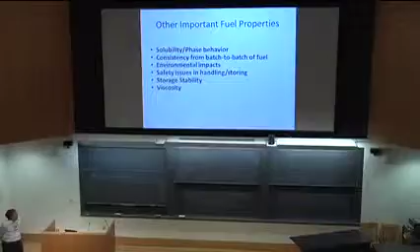Important fuel properties: solubility and phase behavior, consistency in production, environmental impacts, safety, storage stability, and viscosity.

All right, so solubility and phase behavior. A really important thing to realize about alternative fuels is that it's very likely that they're going to be diluted into petroleum fuels to start with. And if you start adding a lot of the alternative fuel into your petroleum fuel stream, you can exceed the solubility limit, and that can cause a lot of trouble. You can make an emulsion, you can have different kinds of phase separations, and that can clog the fuel filter, clog the fuel injection system.

And so that's a really serious performance problem. And so you have to really know the phase diagram of your proposed new fuel component with gasoline or with diesel or with jet fuel, whichever you're going to try to dissolve it into.

Also, in practice, all the fuels are often exposed to water. There's leaks in the tanks, there's leaks in the pipelines, so there's water present. And the current fuels are designed to be very hydrophobic, so they don't really dissolve into the water. If you have a fuel component that does dissolve into the water, when the water comes into contact with the fuel, that component will migrate over into the water phase.

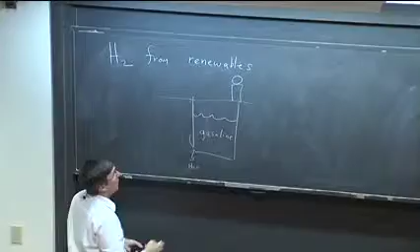For example, suppose you have a gasoline tank under the ground at a gas station, and you have your gasoline in here. If you have a little leak here, and there's groundwater flowing by, the gasoline, if it has components that are soluble in water, those will tend to migrate into the water.

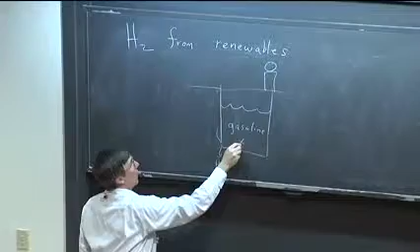And they'll be carried away. Suppose I have some molecule X, and it's soluble in water. After a while, this water is going to have some X in it. And if this goes down to somebody's well, and then they drink it, then you better hope that X is not toxic, or you have a really big problem. So knowing whether or not the component you're adding to the gasoline is soluble in water, whether or not it's biodegradable, whether or not it's toxic—those are crucial things you need to know.

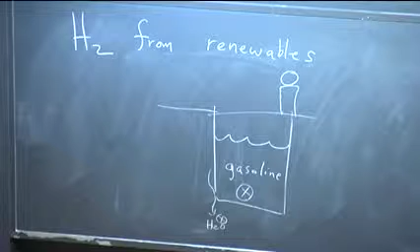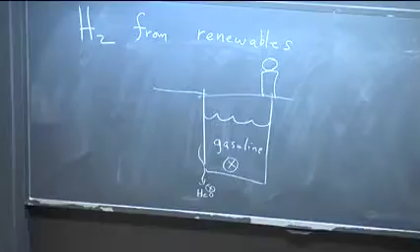Also, a more subtle thing is that if you get water into a tank, sometimes you have weird phase behavior, so that you have some polar components dissolved enough in the gasoline that it's okay, but when you add water, it might form a two-phase or even a three-phase system. And so that can be surprising to you, that you thought you were safe, but because you add a little bit of water, you may actually induce a phase separation.

And that's a problem in pipelines. So right now, ethanol is shipped separately from gasoline. It has to be mixed up with the gasoline very close to the gas station, because they found out when they put the ethanol in the gasoline ahead of time and shipped it through pipelines, there were little puddles of water on the bottoms of pipelines. When the ethanol-gasoline mixture got in contact with that water, that phase actually expanded.

A lot of the ethanol went into the water phase, and then you get big blobs of water-ethanol. The gasoline that went through was being stripped of the ethanol, so it didn't have the right amount of ethanol in it. And every once in a while, a big slug of this water-ethanol mixture would come out, and the person who filled their car up with the water-ethanol might be really annoyed because their car wouldn't work. So this is a problem.

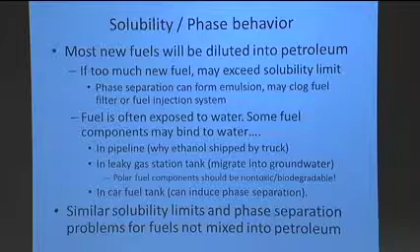And there's similar kinds of problems with solubility if you have a different vision. So if you don't envision that your new fuel is going to be mixed in with the petroleum fuel but kept separately, you still have to worry about what it's going to do with water, because your tanks are still going to leak. You're still going to have groundwater nearby, and you're getting some water into your tanks, so you have to figure out what's going to happen. So you really have to know your solubility and phase behavior.

Consistency. So we're making most of the fuels from materials we dig out of the ground or we grow plants, and it's very inconsistent. The stuff you find in nature is not pure anything. It's some mixture, and the mixture composition varies from place to place and time to time.

But when you make the fuel, you want the finished fuel to always satisfy the specifications that are important for the engine operation. And so this is tricky: you have to make your manufacturing process robust over the range of variation of your input materials.

The whole system for fuel distribution, processing, and vehicles is going to work over some range of fuel parameters. But if your fuel gets outside that range, it's not going to work, and there'll be some failure. Who knows what the failure is going to be, but it's something bad, probably.

Because the scale is so big, if you're running 80 million barrels a day, even a 1% problem is 800,000 barrels in one day. That's a really big problem.

So if you have an off-spec batch of fuel, say you're running a refinery that's maybe 30,000 barrels a day, you run it for 8 hours, one shift, you have a problem. Say the operator in one shift doesn't know what he's doing, and so you make an off-spec batch. Well, that's a problem. Now I have 10,000 barrels of material that's off-spec. I can't sell to anybody.

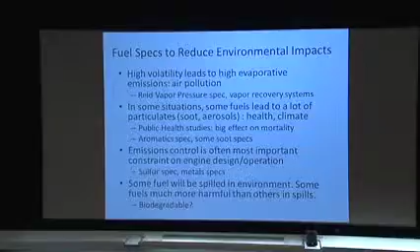This leads to fuel specifications like the sulfur spec and specs of metals in the fuel. Those of you who work in diesel fuel will be familiar with ULSD, ultra-low sulfur diesel specification. Your new fuel, when you manufacture it, whatever you start with, is likely to have some impurities in it, so you have to make sure those impurities are low enough to satisfy all these requirements.

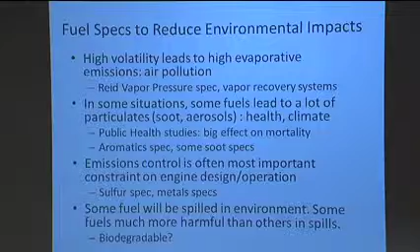And then biodegradability is a critical issue. There's a lot of components in fuels. Some of the components are very innocuous, some of them are really bad, and you've got to know when you make your fuel what you've got.

All right, fuels are really dangerous. Gasoline, for example, is 35 megajoules per liter. That's a lot of joules, and if you light it, you'll know it. Have you ever seen those nice explosions in Hollywood movies? They're usually just a tiny bit of gasoline, and you can make a really impressive fireball.

Also, most of the fuels are toxic, mostly carcinogenic. A lot of the fumes affect the brain and nervous system. Basically, they're really bad, and so the safety issues are really very serious.

There's a famous story about low volatility and high volatility. If you make the volatility low enough, it's hard to ignite the fuel because you're at the lean limit—you don't have enough fuel in the gas phase. So that's safe. Diesel fuel is designed to be like that.

If you have a very high volatility fuel, the tank will be flushed, all the air will get flushed out. In a gasoline storage tank, the gasoline is so volatile it makes enough vapors to push the air out of the tank. So at least the mixture inside the tank is not flammable because there's not enough air—you're at the rich limit. Of course, there'll be some distance outside the tank where it's mixed with air, and there will be a place where you can light it on fire, which is why they have all those warning signs around a gas station about not letting any sparks nearby.

But it's much safer that way. If you could actually have a combustible mixture inside the tank, if the flame would ever flash back into the tank, you could have a really serious problem. Knowing this is very important.

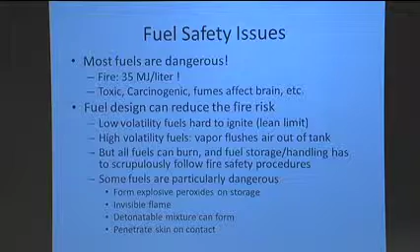Some fuels burn with invisible flames, also kind of scary. Some fuels it's possible to make detonatable mixtures, though this is relatively uncommon. And some fuels are skin soluble—the fuel will go directly through your skin barrier. That's usually very bad because it'll carry with it whatever is dissolved in the fuel, and if that's a carcinogen, it could be delivered directly into your bloodstream. So these are all things you need to worry about.

Fuel safety, storage stability: most of the fuels react with air. They make peroxides, they also make gums and phase separations, and some of the fuels will polymerize. All these problems have led to the olefin specs on fuels. A lot of fuels are treated with additives to try to ameliorate these problems, but typically this is still a problem.

So if I buy gasoline and leave it in my garage for a couple of months, then pour it in my lawnmower, the lawnmower won't work because there's so much gum that it'll clog the fuel injector. So fuels are still not really that stable.

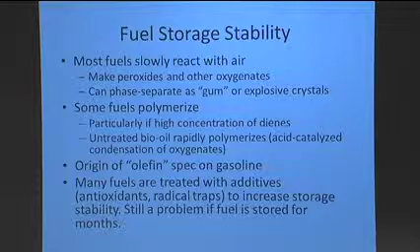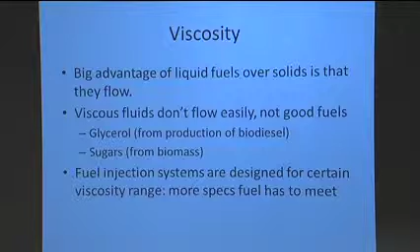And then viscosity—you just have to have a low enough viscosity. This is problematic for some of the biomaterials; glycerol and sugars are both very, very viscous, so they won't work with conventional fuel injectors. There's a bunch of specs that have to do with the fuel injection systems, and they're different for diesel and for gasoline.

All right, so what have we done so far? We decided that we want to have some alternatives to petroleum to reduce the environmental impacts, increase the supply and security, and reduce the price. We've thought about a lot of different possibilities and the different properties.

What happens in practice is that most of the new fuels are diluted into gasoline or diesel. That's very practical because the vehicles use those fuels and the infrastructure exists to distribute them. But it has the problem that you can't sell your new material for anything more than the price of gasoline or diesel.

But the production cost of all the new fuels is higher than the production cost of petroleum. So you're basically in a bad situation if you're manufacturing a new fuel, because you're the high-cost supplier into a commodity market—and if you study economics, that's the place you don't want to be. You're liable, if demand shrinks or your competitors' production rises, to be squeezed out. The price may drop below your production cost, and then your profit margin is really small, which means you won't be able to pay your investors back very fast. That's a really bad situation.

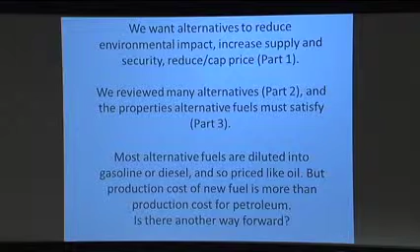So is there any other option? One option might be if you could actually introduce a third fuel at the gas station. So here's the $64,000 question: is there any possible way you could get a third fuel to succeed in the marketplace next to gasoline and diesel?

Now there are good reasons why this is hard to do. Because if you dilute whatever you put into petroleum, then basically it's mostly petroleum, and the fuel will act like petroleum—so you're not going to screw it up, and it'll work fine in the existing engines. And you don't need any new distribution infrastructure. That's a huge advantage too.

But if you had a third fuel, you'd open up a whole lot of possibilities for new engines that wouldn't have to be stuck using the same old fuels we have now. You could insulate your new fuel from oil price shocks—if the oil price collapsed, your fuel might still have a market because there might be some vehicles that especially use your fuel.

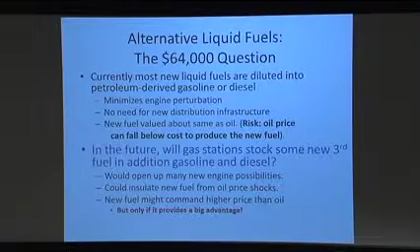And maybe even your fuel could get a higher price than oil, if you gave some special advantage to the customer that he decides is worthwhile. But you really have to provide a big advantage to make this work. So this is a crucial question for anybody who wants to invent a new fuel that's not going to be diluted into gasoline or diesel, but actually replace them.

So let's think about how this could work. One possibility is you just make a fuel that's not soluble in gasoline or diesel. If it's not soluble, then they can't dilute it in. There are some materials like this—some polyols, some other polyoxygenates—maybe you could make these from biomass.

But this is like a totally fruitcake option—no one has ever considered this as far as I know. You'd have to think: well, if I have some new fuel that's not soluble in the old fuels, what am I going to give the customer that's going to make him want to buy my fuel instead of gasoline or diesel? That's a crucial question.

The other possibility is you could take ordinary oil-soluble molecules, but there's something special about keeping them separate that makes it worthwhile for the gas station to keep them separate and worthwhile for the customer to want to buy them specially. There are two I know of: methanol and ethanol, because they have very unusual vaporization and rather low energy densities. Those properties make them really good for octane boosts if you do direct injection. When you directly inject into a cylinder, you get a very big evaporative cooling, so the temperature of the cylinder drops a lot, which changes the ignition delay a lot.

And so you're in a condition where your fuel would tend to ignite too fast. This is a way to really slow it down. And also you get a lot of charge cooling because you put in a fuel with a very high energy of vaporization. So you can get a lot more air crammed into the cylinder.

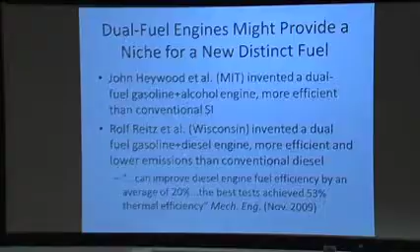And I think Ford is pursuing this, but it has not commercialized it as far as I know.

Professor Reitz, who was in the audience earlier today, invented a dual fuel gasoline and diesel engine. He takes advantage of the fact that you can shift how much gasoline and how much diesel you feed, to try to keep the ignition delay of an HCCI type engine really optimal all the time. That's also very nice. He demonstrated that under some cases you get 53% thermal efficiency, which is pretty darn good for an internal combustion engine.

And if you want to know more about that, don't ask me, ask Professor Reitz. But there's a small company trying to commercialize this one right now. Now this one doesn't actually use a new fuel, it just uses the two existing fuels simultaneously. But I think concepts like this potentially might lead to a third fuel actually being useful.

All right, so something's going to happen. The fuel production is plateaued, the fuel demand just keeps on increasing, the price of oil is going up, the current system is not environmentally responsible. It's dumping a lot of greenhouse gases in the atmosphere. Nobody has any energy security. But it's hard to predict what's going to happen to solve the problem, and it depends on a lot of policy decisions.

There's sort of a time that maybe we could add a third fuel at the pump, but who knows what it's going to be. Maybe it'll be electricity. Maybe the whole thing will be plug-in hybrids and there'll be fast recharge stations at the gas station. Who knows? The key is, if the vehicle technology can actually take advantage of the third fuel in a way that the customer and everybody can see a real benefit, then I think there's a chance this could actually happen right now because of the whole situation.

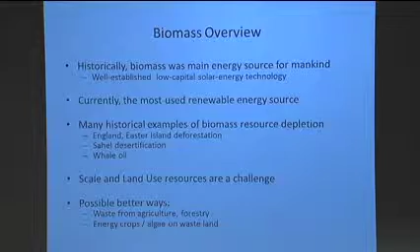But there are some possibilities. There's a lot of waste actually from agriculture and from forestry, and you could try to use that waste material more efficiently and maybe get some energy use out of that. It's also possible you could grow special crops or algae on wastelands, taking land which is not really valued right now and making it into something more valuable.

Now, the way biomass works is that fundamentally it's solar energy, and we're just using the plant to capture the solar energy for us. And this is the reaction. The process is about 1% efficient, so you can capture about 1% of the energy that's in the photons ends up being captured in the biomass material. And the solar constant is pretty big.

It's about 1 kilowatt per meter squared of energy hitting the Earth. Now, a lot of the energy reflects off stuff like clouds or gets diffused. So this is a map of where the energy actually is. The red and white regions have pretty much solar energy. The purple and blue regions don't have much. But this number is pretty big, 1 kilowatt per meter squared.

However, when you use photosynthesis, it's not very efficient. So you never achieve 3 megawatts per kilometer squared, which is not that much. So, just for example, my little town of 20,000 people needs a 15 megawatt electric generator. So we would need to be using all the biomass we could grow in a kilometer square, which would be maybe a quarter of the size of my town, 100% devoted just to growing biocrops or something to grow out that much energy.

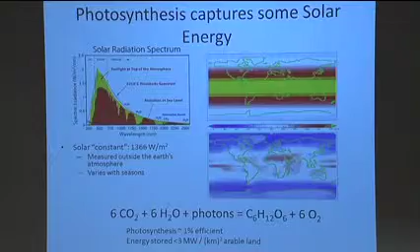The photosynthesis stores about 300 exajoules per year, which is a lot across the globe. So this is really a lot of energy. However, our energy use is even more, 400 exajoules per year. So we use more energy than the total photosynthesis of the Earth. And in fertile areas, this is the number, about 10 to the minus 5 exajoules per kilometer squared per year.

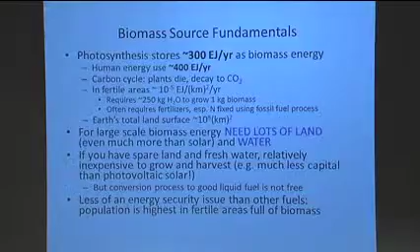A really important number in biomass is water. It typically takes about 250 kilograms of water to make 1 kilogram of biomass. So you can see it very clearly if you go from a region that has a lot of rainfall to one that's drier, the plants just really drop off fast. So if you drive west across Kansas, for example, the eastern edge of Kansas is one of the most fertile areas in the world. And if you get to the western edge, you can barely grow anything. It's 100% just due to the rainfall being different across the state.

Here's the total land surface area of the Earth, if you want to figure that out. And also, growing biomass often requires fertilizers, especially nitrogen, actually ammonia, fixed from fossil fuels. So currently our agricultural system relies very heavily on fossil fuel inputs, and so it's not really CO2 neutral. And if you were to greatly increase the amount of agriculture, you'd also increase the amount of CO2 being released from fossil fuels.

But if you have a lot of land and a lot of water, then it's a relatively inexpensive way to capture some energy, because basically you just throw some seeds out there, there's a lot of rain, and you have nice soil, things will just grow, right? And you come back and chop it all down, and you can burn it or whatever you want to get the energy back. So it's a nice, inexpensive way to capture solar energy. It doesn't take much capital investment.

You can contrast this to photovoltaics, which are about an order of magnitude more efficient at converting the solar energy into useful energy for us. But the capital cost is like several orders of magnitude higher than the capital cost of buying some seeds.

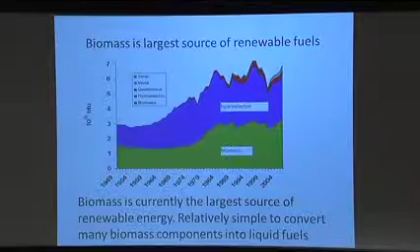But despite all that, biomass is the largest source of renewable fuels now—these are the renewables, mostly hydroelectric power and biomass for fuel. And it's relatively simple to convert many components of biomass to liquid fuels, though not as simple as you think; I'll tell you more about that in a second. The governments have recently mandated that people have to use ethanol and biodiesel in a lot of products, and because of the mandates, the amount of energy being produced as biofuels is really going up.

Historically, wood has been the main energy source from biomass. Usually a lot of biomass is wood, and people would use wood to make fires. That's the traditional thing to do with biomass. And recently, people start to make it into liquid fuels.

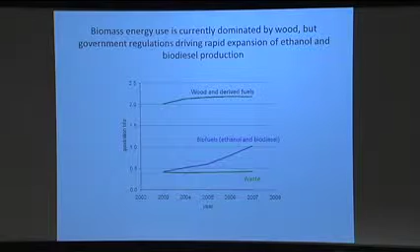All right, so let's just do a little summary of where we are right now. Ethanol is actually really old—there's evidence of fermentation from 7,000 BC, which I think is pretty good engineering back then. By 800 AD, they were distilling alcohol. In 1796, the first person made absolute pure ethanol, where they were able to get the water out all the way. Oil wasn't discovered until 1859. They invented the gasoline-powered car in 1885. In 1908, when Ford was trying to think of what fuel to use for his new Model T, he said, well, ethanol would be great. So ethanol's been in the energy picture a long time.

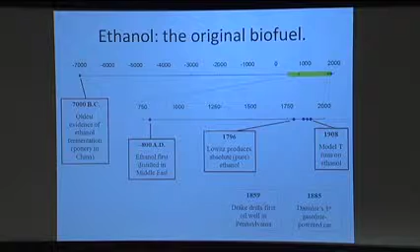And the way it's made is by yeast. If you have oxygen around, the biomass reacts to the oxygen. The yeast eats it up with oxygen and makes CO2, and it makes lots and lots of energy. But if you deprive the yeast of oxygen, they can still use this to make energy, but they only make 2 ATPs instead of 36. So the yeast would really prefer to react with oxygen, but if you're nasty and you suffocate the yeast by closing the lid, then the yeast will make do and just convert to ethanol.

Notice what happens when you take a glucose molecule. You make 2 CO2s, so 2 of the carbons go away as CO2, and 4 of them go into the ethanol. We've taken a solid fuel that's not very high energy density and made it into a higher energy density liquid fuel. So this is really beneficial from the liquid fuels point of view, and this process is pretty darn efficient.

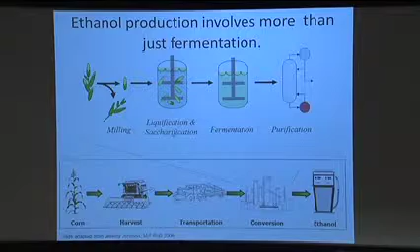Now, this process is actually more complicated than what I just wrote. You have to harvest the corn, transport the corn to your facility, then do some milling process steps. Then you put in some enzymes to convert the cornstarch into sugars. Then you take the sugars and ferment them with your yeast. Then you get the mixture, which is mostly water with a little bit of alcohol in it. And then you distill it, and you get your ethanol, and then you can send it to your pump. So this is actually pretty complicated.

The problem is that cornstarch works pretty well to make ethanol, but it takes too much land. Suppose we wanted to replace 1/3 of the gasoline used in the United States, 1/3 of the transportation fuels, using cornstarch—we'd have to use 320 million acres in corn. But the total amount of agricultural land in the whole United States is only 450 million acres. So we'd have to have like 75% of all the agricultural land in the United States planted in corn, and we'd still only replace 1/3 of the liquid transportation fuels we use. So this is really not a scalable solution for full scale—this is maybe a big niche application.

At the present, we don't have this much land in corn. We only have replaced 5% instead of 33%, so about 1/6 the size, approximately the size of Iowa. We've replaced 5% of the gasoline, and we have enough capacity in the United States to increase that a little bit. So there's a big debate to go from E10 to E15—they want to increase it a little bit. I think that'll about hit the limit of how much corn you can grow in the United States within current market conditions.

There was a study, a very famous study called the billion-ton study—you might want to look it up. It tried to figure out what else we could do: if we can't use cornstarch, we better use other parts of the plants. They counted up how much plant material there was in the United States, and discovered about 1 billion tons each year of waste biomass in the whole country, counting all the waste material from every plant. Most of that is trees and corn stover, which is the rest of the corn plant, but there's also some straw from wheat and other grains, and a bunch of little tiny ones. The corn stalks and the trees add up to each about 500 million tons, which is quite a lot of material. Altogether that would be enough to replace about 1/3 of the liquid fuels.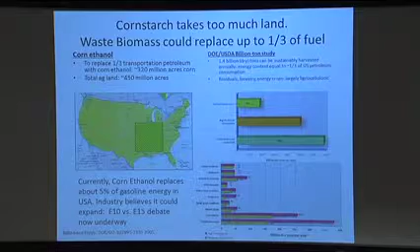Now that's a discouraging number, I guess, since that means we would need about 3 billion tons of biomass if we were actually going to replace all the liquid fuels used by the United States, and about 12 billion tons to replace all the fuels in the whole world, which is way out of range. But this kind of ratio—1/3, or maybe more realistically 1/4 of all the liquid fuels—could possibly be replaced by waste biomass, without really affecting the ecosystem too much.

Now, currently, we make corn ethanol using the process I showed you. An interesting thing to do is figure out the energy balance. When you grow the corn, you're absorbing solar energy, so that's sort of for free, and it makes a nice cornstarch. But actually, I had to give some fertilizer to the corn, so it cost me a bunch of fossil fuel to make the ammonia to make the fertilizer. Then I use a tractor to grow it, so I need some diesel fuel for my tractor. And then I need a truck to carry the stuff from the farm to the plant, so I need some more diesel fuel for that.

When I do the fermentation, I need to distill the mixture, separate the alcohol from the water. That takes a lot of energy, and you usually use natural gas for that. When I add up all that energy, it turns out that I use just as much fossil fuel energy to make the fuel as I get out of it. So this whole thing is actually not of any greenhouse gas benefit at all, or almost zero.

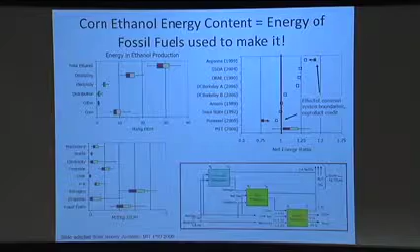So the corn ethanol thing has nothing to do with greenhouse gas. It's not harmful, but what it really is, is converting natural gas energy into liquid fuel, sort of one for one. Now that works economically with a subsidy, because natural gas is cheap and liquid fuel is expensive. So it works okay economically, but it's really nothing to do with the environment.

Now on the other hand, if you can make the ethanol from the whole plant, all the biomass, then the whole story is completely different. Then you would have a very big benefit because a lot of the fuel energy would actually be coming from solar energy, not from fossil fuels. And so that would actually have some greenhouse gas benefit.

Unfortunately, despite a ton of work by a lot of people, nobody does this. The calculation is the price of production of ethanol from biomass currently is about $120 per barrel, but the price of oil is only about $85 per barrel. So they can't get a lot of investors really excited about investing in these new plants.

All right, now the other conventional biofuel right now is biodiesel. It's a fatty acid, and we react it with methanol to make a methyl ester. Many of you in the CEFRC are studying this.

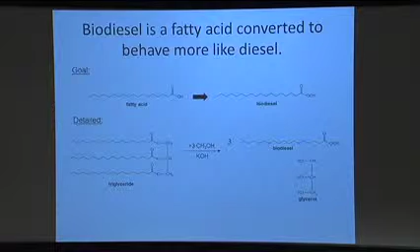Really, the fatty acids aren't free in the organism. They come in these forms of fats called triglycerides. So you have to do some reaction, and you make this glycerol as a side product. But this chemistry is pretty straightforward, and people know how to do this very well. And so there are lots and lots of plants around the world that make biodiesel.

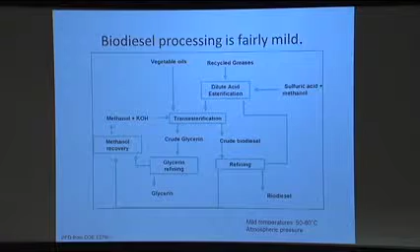In fact, even MIT has a little room that does it. It makes off-spec biodiesel, but at least we make some. It's really a pretty good fuel. Biodiesel is used in trucks, it's used in heating oil. It really works fine. It works in jet fuel - they did some experiments that way.

The problem is scale. So the best source of biodiesel right now is oil palm, a special palm tree that's been bred to have very high production of oil. You can get 600 gallons per acre per year if you grow that in a very fertile area. In Europe, they use rapeseed, also called canola, and they get about 127 gallons per acre per year. In the US, people usually grow soybeans, and they get 48 gallons per acre per year.

Now, if you think about that, you sell the fuel for maybe $2 a gallon. That means you only make 96 bucks for your whole acre of farmland in Iowa for a year. It's not going to pay your mortgage. So this is just not economical, and it's because the production is too low. Even on the oil palm places, I think it only works because the labor charges are very low there, and the productivity is very high because the weather is so good and the soil is so good.

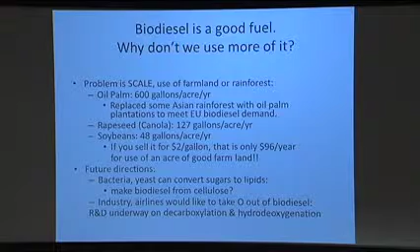So what could you do? Well, one idea that's really promising, I think, is that there's some bacteria and some yeast which can actually make these oils from glucose. So suppose you took cellulose, took it apart to glucose, fed the glucose to the bugs - they can make it into bio-oil. That might be a very effective way to go forward. There's a lot of people who would like to take the oxygen out of the biodiesel and make it into an alkane, and there's a lot of research underway on this for uses in jet fuel especially.

All right, quiz. Suppose one of you guys is really brilliant and you invented a really inexpensive way that you just dump some wood in, and out the back of your can comes beautiful liquid fuel. Write down what you think would happen if that invention got widely disseminated.

Yeah, deforestation, that's right. So it's my opinion too. I agree that if this were to get widely disseminated, places that have a lot of forest and a lot of poor people, it's a great way to make a living. You go out there and chop the forest down, feed it into your machine, get this nice liquid fuel you can ship and sell in the world market at oil prices. So I think there would be really strong pressure for deforestation. Demand will increase more than what it is right now because they can get cheaper oil.

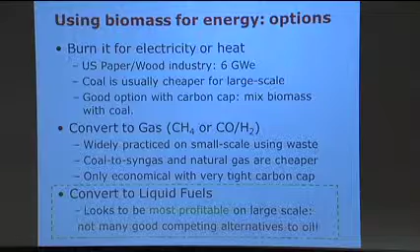So I think the most likely thing that biomass would be used for is to make liquid fuels. And that would definitely be the most profitable thing because liquid fuels are so expensive. And there aren't that many good competing alternatives, so biomass has the best chance to be successful in that market.

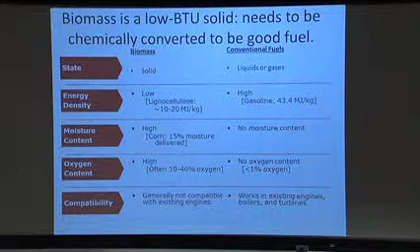So you have two choices. You can do it biologically. Usually people do this with microbes, which they use to convert biomass to fuels. You could also do it by actually growing plants like oil palm, or you can genetically engineer plants to make stuff you want. Also some algae directly make stuff you want.

The pros with the biological approach are that you have the possibility of engineering real specificity, so you can make a biological system produce exactly the chemical you want. In fact, all the chiral centers in the molecule will be exactly what you specify. It's incredible, actually—the plants and microbes are the best chemists in the world. They can just exactly make whatever you want.

The downside is that they also want to be fed exactly with what they want, and if you feed the bugs the wrong thing, they get sick and die. So you're very constrained in what you can do with a biological system. Also, the biological systems have relatively low throughput—processing times of days, which translates into very large volumes of reactors. So if you're going to make 1 million barrels per day, you need really huge fermentation ponds to make that much material. And then you typically have separation issues.

The biomass itself is a horrible mixture, and then when you run the fermentation to make something, you make another horrible mixture. So you have two difficult separation steps, and often the separations are most of the capital cost of the process. But there are examples of people doing this—ethanol, methane, and butanol are all manufactured at reasonably large scales in this way.

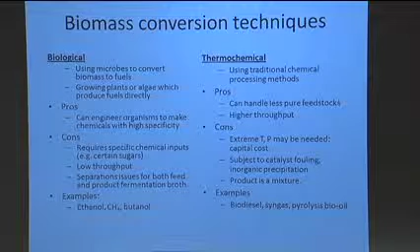That technology works for very complicated mixtures, and also has pretty high throughput. So you'll have reactor times of seconds or minutes, as opposed to days for a bioreactor, which means the reactors can be much smaller. You have much higher intensity of the process, much smaller plants, so you can process more material.

The cons are that in order to achieve the very high productivity and high throughput, usually you have to use very high temperatures and often very high pressures, because a lot of the processes are gas phase. And that makes the equipment more expensive. So it's smaller, but there's a trade-off here—your reactors are actually more expensive because you have to make them able to handle the temperature and pressure.

And you usually have to add catalysts, which costs some money. The biomass will often foul the catalysts, and that gets to be a very serious problem, because every time it fouls a catalyst, you have to take all the catalyst out and put new catalyst in. That costs you money, and also costs you time to clean the catalyst, and it shuts down the unit for a while, so that costs you money too—capital cost.

The product you make from thermochemical processing is going to be a mixture. So you put mixture in, mixture out. If that mixture happens to be what you want for your fuel, that's great. But you don't have that much control, and it might not be exactly what you want. And if you wanted to separate it, it might be difficult to make the separation. There's a lot of examples of this: biodiesel is done by thermochemical processing, syngas can be produced by gasifying biomass, and you can do pyrolysis bio-oil, which I'll explain in a second.

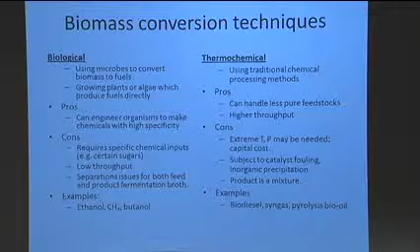Now, a simple idea is, let's forget the whole chemical plant and just use the plant. Let's grow plants that make the fuel we want, and we just go along and pick them. We pick our fruit, and instead of being something I eat, I just squeeze it into my gas tank, and then I'm good to go.

Palm oil is the best example we have of that. We have a plant that grows a material which is pretty close to diesel fuel, and only takes a very small amount of processing to make it into diesel fuel. I don't know the history of palm oil myself, but I assume plant breeders over many years kept picking the palm oils that made the most oil, and kept hybridizing and breeding them to make the palm oil have higher and higher productivity, and that's why it's so high. You could probably bioengineer it even better to make even more oil.

You could probably go back to other plants and do the same kind of thing, try to make them produce more of whatever you wanted as your fuel. There's also a lot of interest in algae, which make oils. There's some natural algae which photosynthesize sunlight to actually make oils directly. They have even higher productivity than palm oil, and they can also grow in salt water instead of fresh water. So you don't have to use them in a place where you would grow normal crops; you can grow them in a brine pond, for example.

The problem with algae is they're very, very diluted in water. So you end up with an even more difficult separation problem than usual. You end up with a little tiny bit of oil in a huge amount of water, and how are you going to get it out?

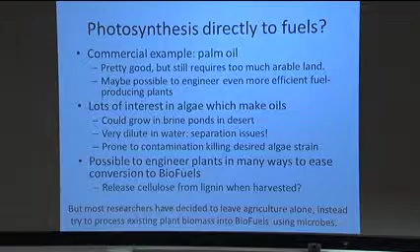Also, the problem with all these genetically engineered strains is that the natural ecosystem is not one pure strain. It's usually like a gazillion different microbes all living together. And if you have any opening to the environment, whatever strain you're trying to grow, by Murphy's Law, will immediately be killed by some invading species, and it'll wipe them out. People have tried algae experiments out in ponds, and almost immediately the algae strain will die, and they'll be replaced by some other strain which doesn't make the oil you want. So you may have to do this in closed reactors all the time, which makes the cost a lot higher.

It's also possible to engineer plants in many clever ways. For example, I know one company that's bioengineered plants so that the lignin will spontaneously break when the plant dies, letting the cellulose out. That makes it a lot easier to harvest the cellulose. There's a lot of crafty things that bioengineers, with their great creativity, can think of to make plants that will make it easier for people to do different steps in the processing. Maybe you guys can think of some more clever ideas from that.

But I would say, overall, most researchers in this field said, forget it, this is too hard. Plants are too hard, agriculture is too hard. Let's just use the waste agricultural material we have already, let's not get into it. So this is like an oddball, small percentage of people working in this area. Most people instead say, let's assume we've got regular biomass. It's made of what's called lignocellulose, which is cellulose, hemicellulose, and it's wrapped in lignin. Lignin is like the impermeable waterproof wrapper that's holding together the cellulose, which is most of the strength of the wood, the cell wall. And there's some hemicellulose there too—I don't know what that's for.

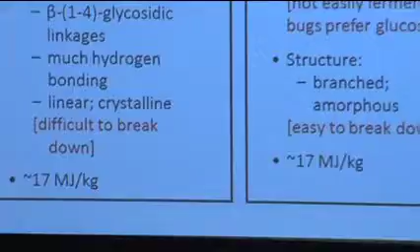And the cellulose is really what you want. It's about 40% of the weight of the plant. And if you can take it apart, it goes right to glucose. Glucose is all-purpose feed for all microbes. And so once you get to that point, then you're golden.

The problem is nothing eats lignin. There's almost no organisms that can eat lignin. Lignin is the plant's material to protect itself from other organisms. And so you have a problem. You really have to get rid of the lignin. And actually, there's not that many thermochemical processes that work to get rid of lignin either. So lignin's a big problem.

And then the hemicellulose is pretty easy to take apart, but most organisms can't eat the 5-ring sugars, and some of them are poisoned by them. So there's a whole issue about how do you persuade the microbes to eat the 5-ring sugars as well? Otherwise, the whole fermentation broth just gets full of 5-ring sugars after a while. And then the high concentrations of the sugars can actually kill the microbes.

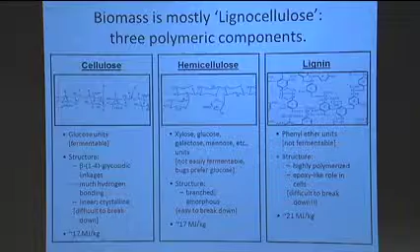Then they take the glucose that was secreted by taking apart some of the cellulose, and they put that into the fermentation broth. If they're good, they've specially treated the yeast so it can also eat the 5-ring sugars as well. And then you get stuff which is basically beer that comes out of there. It's a dilute solution of alcohol with some plant products in it. And then they have to purify the ethanol, and that's how you get your ethanol fuel.

Now, when you try to figure out the energy balance, it's totally different. We don't have to add as much agricultural inputs because we're basically getting this for free as a waste material. The lignin basically has no value, but we can burn some of it to get some of the heat we need for the separations. And in regular corn ethanol, there's a cornstarch byproduct called DDGS, which is an animal feed. You don't get that from the stalks. So that turns out to be economically hugely important because the animal feed actually sells for more than the fuel does. And so the economics are screwed up by the fact that you don't have that. And that really hurts the cellulosic process a lot, economically.

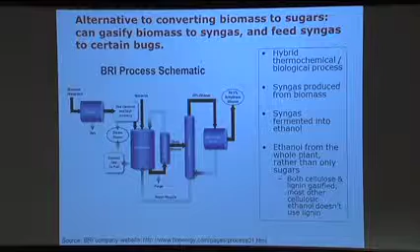Now, another option, instead of trying to take apart the biomass to make sugars, is you could just gasify the whole biomass in a gasifier, and that would make syngas, hydrogen and CO. And then there's some special microbes which can actually eat carbon monoxide. And they'll eat the carbon monoxide and make ethanol. And so this is like an alternative approach. It avoids the acid treatment and the cellulase and a lot of the problems earlier on. Of course, you substitute all the problems with gasifiers with biomass, which are that the gasifiers tend to get plugged by tars, and you have to do some special stuff to make sure the gasifiers are good. But this is definitely a possibility as well.

Now, the general idea is we're going to take some feedstock, feed it to our bugs, which we call our conversion technology. It's going to be some metabolism of some bug, and it's going to secrete our fuel that we want. That's the general concept.

And we want to change the bugs. The bugs naturally don't want to make fuel. They don't work for Exxon. They just want to grow and be peaceful bugs and do their own bug thing. And they're not really trying to make fuel. And we want to change that.

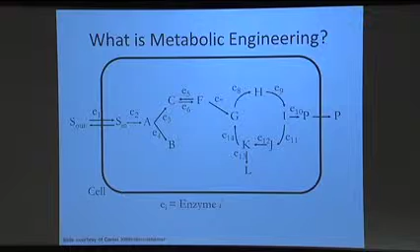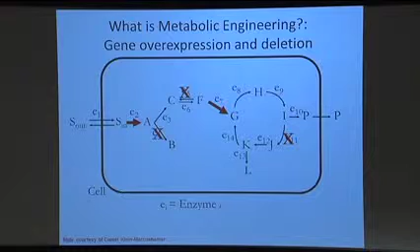So what we want to change is we want to change the enzymes inside the microorganism and regulate the enzymes so that it goes to the product we want and doesn't do all this other stuff that the microbe would normally do. So we'll go and we'll get rid of some enzymes that run the pathways we don't like and block off that way, and then we'll add and increase the production of this certain enzyme that runs the first step, and so then we can force the thing to run through to the product we want in a higher yield. So this is called metabolic engineering. If you understand how the microbe works very well, you can figure out which enzymes to block, which ones to promote, and then you can drive the microorganism to make more of the stuff you want.

You can also add enzymes which don't even exist in that organism. So you can do genetic engineering, bring in strange enzymes from the outside from other organisms, put them inside this organism, and make them introduce new pathways.

For example, if I wanted to make product P prime, I could add an enzyme that converts B to D, and another one that makes D to P prime, and then P prime will come out. And then I might want to shut off this channel, for example get rid of E3, and just force it to go this way.

The metabolic engineers know all about this stuff. It's super complicated. The way I wrote it here is really simple. In reality, each of these enzymes has a control loop - there's another molecule that promotes it, another one that deactivates it, and there's usually some complicated control structure that's sensing production of P, and using that to downregulate E10 and upregulate E11 or something like that.

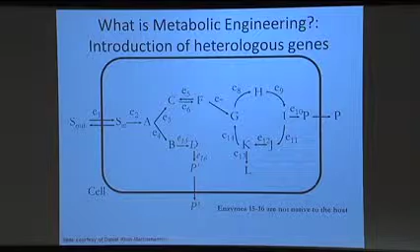I need to do something with those control loops as well. But the metabolic engineers have figured this out for a lot of organisms, especially for E. coli, also for yeast. And so then they can actually make this work.

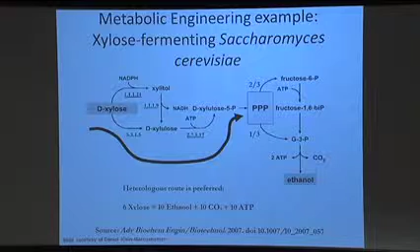Here's some examples. They took the yeast and they made it ferment 5-carbon sugar. Xylose is a 5-carbon sugar, and made it into ethanol. They did this by a heterologous route, which I think means they added an enzyme that doesn't exist in regular yeast to make this happen, but it actually works. You can read about it in that paper, 2007.

You can take glycerol, which is a byproduct from producing biodiesel, and they can genetically engineer E. coli to convert glycerol into ethanol. That was done in 2008.

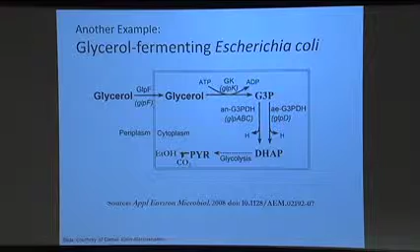You can add entire whole pathways that don't exist in the organism. So this is adding 1, 2, 3, 4, 5 new enzymes and their control structures and a bunch of other stuff to E. coli. And now E. coli suddenly makes butanol, where it never did before. They took these from some other organism that makes butanol, but the other organism doesn't grow as fast as E. coli, so it wasn't as desirable.

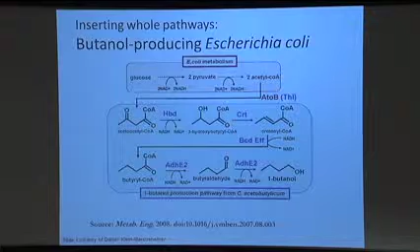So this one, they get E. coli which grows really fast, and then it also can now make butanol as well. So you can do all kinds of fun games with genetic engineering to try to make it more.

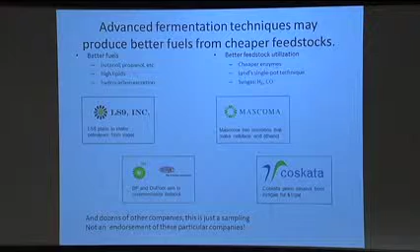Because of all the different diversity of ideas about what to do, there's a ton of little companies that do this, and here's some of them - there's dozens and dozens. I don't want to endorse any of them, I have no idea which of these guys are actually going to be successful. I'm not an investment advisor, I don't recommend buying stock in anybody, but if you want to, go ahead. They're kind of cool, so if you wanted to own stock in a cool company, they have a lot of cool ideas and they're trying to figure out how to make this actually work.

To summarize, there's tons of different biological routes. You can engineer the plant, or you can engineer the algae, but most researchers have decided just to go with waste biomass and convert it. The processes are slow, but the equipment is not that expensive, so maybe it works out okay. The bugs mostly require pure sugars, and all of them require harvesting and transporting the biomass. So you have a lot of upfront costs, which you're stuck with, and that actually sets a floor in the price. So you really need the oil price and fuel price to be high, otherwise you're going to be in trouble.

You can engineer the bugs to make specific fuel molecules you want with tremendous specificity. It's incredible - so if you knew what you wanted, you'd be really good. The problem is with this audience and with me, most of the time I don't know what fuel I really want, so I don't know what to tell the bioengineers.

They say, well, what should I make my bug make? Here's 47 different molecules I know how to make, which one is a great fuel? And I was like, well, we've never had any of them, I've never put any of these in any engine - how do I know which one is good? And so that's actually a big part of the CEFRC, trying to figure out: can we predict which proposed molecules are actually worthwhile to make as fuels?

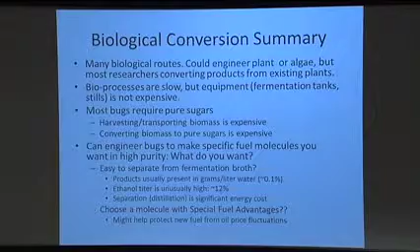A big problem in bioprocessing is separations. Most fermentations only make grams per liter of the product you want—that's 0.1%. Then you have to purify it up to pure stuff, so you have to get rid of a tremendous amount of water in the fermentation broth. That's often a really difficult problem.

The best material is ethanol, which has been genetically engineered over the years by brewers to make it up to 12%, which is pretty good. But even 12% is so hard to separate out of something. So there's a lot of water you're processing, and that's usually a very significant cost.

Maybe what you want is to genetically engineer a fuel molecule which just separates from water spontaneously. That might be the thing to do, and in fact a couple of companies have ideas like that. The other option is if you could think of some special fuel advantage that would make your molecule really valuable, so people would pay a lot of money for it, that might make your process really go. If you can think of what would be really great as a fuel, so the customer would really want to buy it, then maybe you can get them to pay enough to make it worthwhile to do this expensive separation process.

Okay, I know you're getting tired, but this is the last one—hang in there. Chemical conversion of biomass.

So you have a lot of choices of what to do. There's a big branch point: can I operate on the full biomass, or do I have to do all that pre-separation stuff to try to get the cellulose out, the sugars? There's chemical processes based on both routes.

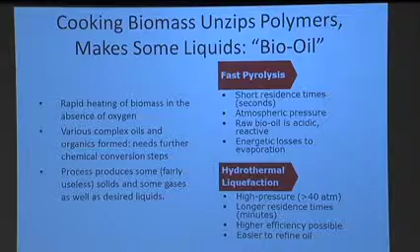All right, so there's fast pyrolysis, and that's the way it usually works. Because of this problem that the product is not stable, because it's going to polymerize, and corrosive, usually people have to immediately hydrogenate it using hydrogen they make from natural gas. And that's the most common idea. But this is a pain in the neck because that's also a high-pressure process, and it adds to the expense of the process a lot.

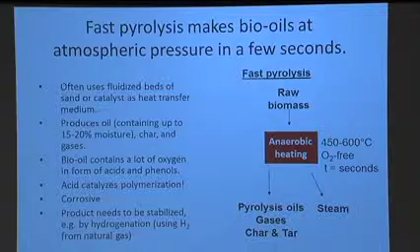And also, you might think of doing this at a farm, but it's unlikely the farmer's going to have a hydrogenator there. So this is a practical problem. You may have to ship it all to a central facility, which adds to transportation cost.

This is the hydrothermal process, and you avoid the enthalpy of vaporization, so you improve your energy efficiency. And because it's all liquid all the time, you can do liquid-liquid heat exchangers, and you can actually get very good heat recuperation, so the energy efficiency is pretty good. But this is a very high pressure, often a couple hundred bar, above 100 bar. And also, high-pressure water is very corrosive itself, so you need to use special metals to make these reactors.

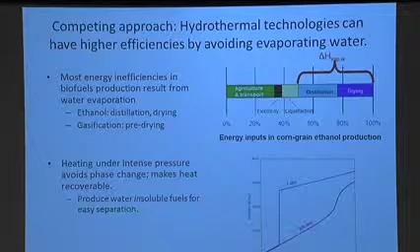So you have a lot of problems. Also, the biomass usually has sodium chloride, a salt, in it. Chlorides in hot water, high pressure, are very corrosive, and so you have a lot of metal problems, metallurgy, leaks, and stuff like that. But it's kind of cool.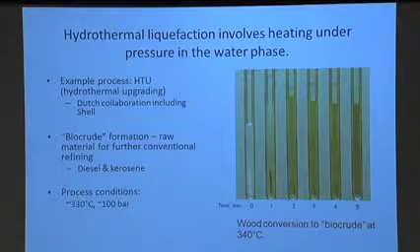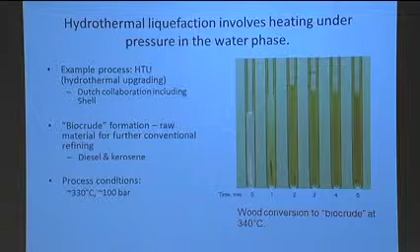So here you put a chunk of wood in water, and then you just heat it up under high pressure at 340 C. You just see the different amounts of time. This is after some minutes, the wood particles just disappearing. Oh, the wood's all gone. So the wood just goes away. It just unzips. So that polymer is gone. It's kind of cool, but the process conditions are kind of tough — 330 C, 100 bar.

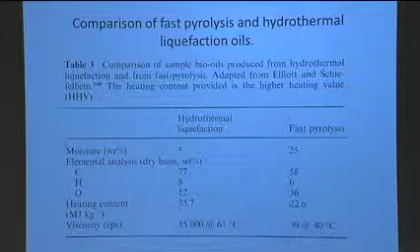All right, and you make different products depending on exactly how you do the cooking. If you do hydrothermal, you make one set. If you do fast pyrolysis, you get a different set. Actually, if you change these conditions, you make slightly different mixtures. All of them have pretty much oxygen left in the product, so you have a problem with too much oxygen in the fuel.

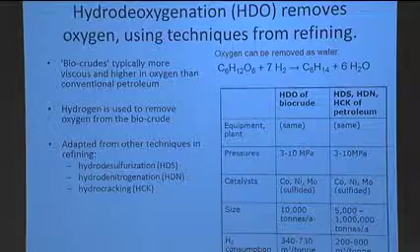So then you have to do hydrodeoxygenation. The most common idea is to add a lot of hydrogen to it — this is actually a lot of hydrogen, so you're really adding hydrogen from an external source. You need other energy to make the hydrogen, and usually that's fossil fuel. So you're losing a lot of the greenhouse benefit, but you're souping up your liquid fuel by adding all this hydrogen.

You're actually adding energy to it, increasing its heat of combustion, and so you can really stretch your biomass. If you have a certain amount of biomass with a certain amount of energy, and you can add hydrogen and get rid of all the oxygen as water while keeping all the carbon, then you get more fuel net.

If biomass is very expensive, this is a way to go, but it loses in the environmental departments. You'll see a lot of papers that say, just use a renewable H2 source, but we don't have a renewable H2 source. If we did, our whole problem would be a lot different, so I think that's a bogus argument. Right now you need a lot of energy to make the hydrogen, but this might still be a good idea, because hydrocarbon fuels are really pretty nice.

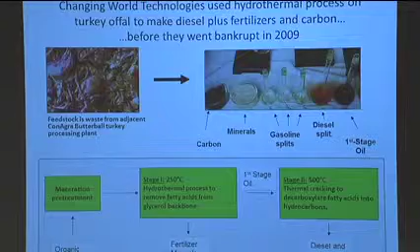Here's a cool plant. They actually had a factory, made it next door to the Butterball turkey plant. They got all the bits of the turkey that Butterball didn't want to sell to anybody, and chopped it up in a maceration plant. Then they heated it to 250 degrees C in water, and that took the fatty acids off. Then they heated it all the way up to 500 degrees C - this is pretty darn hot, 800 Kelvin in really high pressure water - and that cracks everything to smithereens. You get a whole bunch of diesel and gasoline out of that.

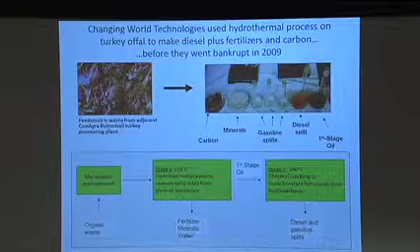And there's the products. You get some char, you get some minerals, like all the salts and stuff that were in the turkey, you get some gasoline, you get some diesel. This is what the black gunk looked like before you cooked it the rest of the way - it was just like bio-crude, a horrible black mess. But if you cook it all the way up...

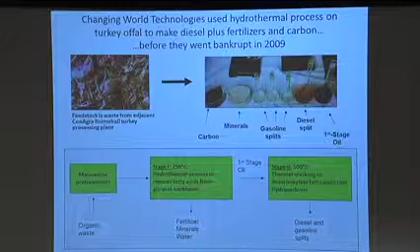So this actually worked. This was a plant, it was doing great - well, not that great. They went bankrupt in 2009, so some investors lost a ton of money on this plant. But it worked, the technology worked. The economics didn't work, and this is a real problem in this whole biofuels area - there's a lot of clever ideas, but man, it's tough to make it really economical.

There's a ton of great work by guys like Dumesic, Lanny Schmidt, Huber - these guys all working on different ways to take different molecules you get from treating the biomass and converting them into different possible fuel molecules. There's a ton, this is very brief, there's actually tons and tons of papers in this. This is a very hot thing to try to figure out all the different things you can make, and some of them you can sell as chemicals, and some might be good fuels.

Why did they go bankrupt?

So when you're a professor and you have this great idea, you go to a venture capitalist and say, give me $20 million, I'm going to build this factory for this cool idea. I tell him how cool it is, and I think it's really cool - that's why we went to it. And he thinks it's cool too, so he says this could be the future of energy. So he gives me $20 million, and I build a factory, and I hire a whole bunch of guys to work there, managers and business guys and everything. If all those guys do their job perfectly, and if my idea is really great, then the venture capitalist is going to make a lot of money. But there's a chance my idea is not that great, there's a chance those guys don't do their jobs perfectly, there's a chance of unforeseen situations. Maybe Butterball decides to close their factory right next door to my plant, so now I have to ship my turkey parts from far away, and the shipping costs make it impossible.

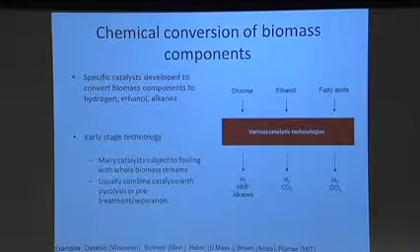The feathers from the turkey get in somewhere, who knows. I think they had a problem here where some of the proteins from the turkey react with some of the sugars and make something with higher viscosity that plugged things up somewhere. They never anticipated that - how do you know until you actually do it? They try little test tube experiments as best they can, but with a small NSF grant you can only afford one student for half a year before you're broke. So you really don't know until you try whether it's going to work.

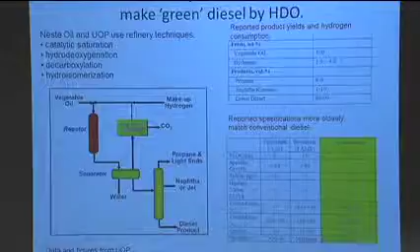There's a lot of people working on conventional methods, using conventional chemistry to get rid of oxygen. This is very big for biodiesel. For example, UOP has a process where they take vegetable oil and process it basically into jet fuel indistinguishable from regular jet fuel, just by hydrogenating like crazy until it's all alkanes. That process definitely works, but it uses a lot of hydrogen, so it's definitely not a greenhouse gas solution. But if your customer is willing to pay a lot for the fact that it came from vegetable oil, for energy security reasons, maybe this makes sense.

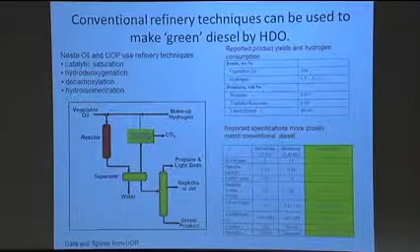To summarize: chemical conversions in general run at high temperature and pressure, so they use much smaller reactors to get higher throughput. It's more like a refinery - really a chemical engineer's thing. The high-pressure reactors are expensive, so the hydrogenation process has a lot of potential problems just because of the pressure. This is also a problem for gasifiers too.

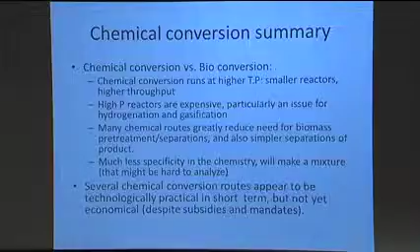The chemical routes really reduce the need for biomass pretreatment, which saves a lot of money in separations, and the products are usually simpler to separate too. But you have a lot less specificity, so it's almost like you're at the mercy of what the biomass is - you run the biomass through your process and you'll get something. You have very few knobs to turn to change what that something is. If it turns out great - like high-octane gasoline you can sell for a lot of money - that's great. If it turns out to be some cruddy stuff you have to use as fuel oil, that's the way life is. There are quite a few chemical conversion routes that seem viable, but as far as I know, none of them are really economical.

So here are some main points. It's definitely practical to make biofuel that you'd dilute into petroleum fuels, but you have to be aware of oil price, because oil price fluctuations could kill you off. If you want to make a third fuel to be independent of oil price, you need to demonstrate it has a really big performance advantage that somebody's willing to pay for. But if you could do that, you might be able to avoid that problem.

The main problem with biomass is it has too much oxygen in it, and you have to remove it, usually as CO2 and water vapor. If you have hydrogen available, it's usually preferable to remove the oxygen as water vapor and keep the carbon, because the carbon adds to the size of your liquid fuel, which you can sell - so you make more money because liquid fuels are so expensive.

For efficiency, separations are the problem, especially water. The biomass is wet, fermentation makes it wetter, and you have all this water separation to do, which is a big problem. So if you can think of clever tricks to avoid or simplify separations, it really helps. Maybe you could make water-insoluble fuels that would self-separate - that might be a huge advantage.